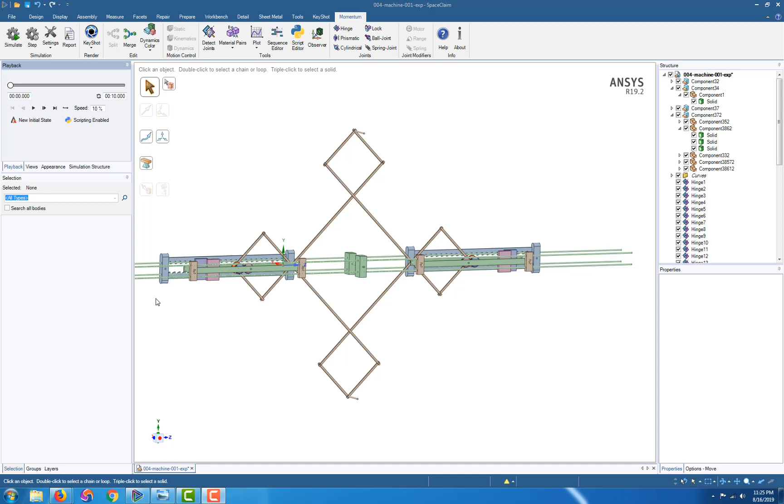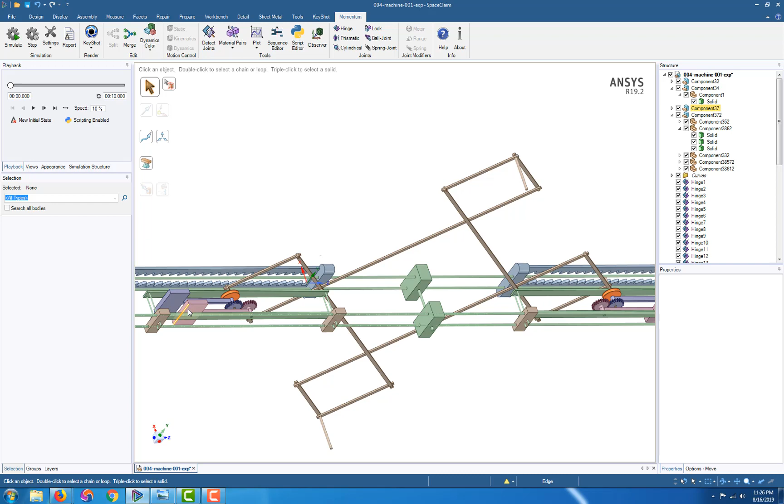Hello, I'm developing a different design. It's kind of the same, but I'm trying to fix some of the issues I had in the previous design, which is basically the synchronization of these hammers - that's the most important thing in this device. So there's a bit more pieces.

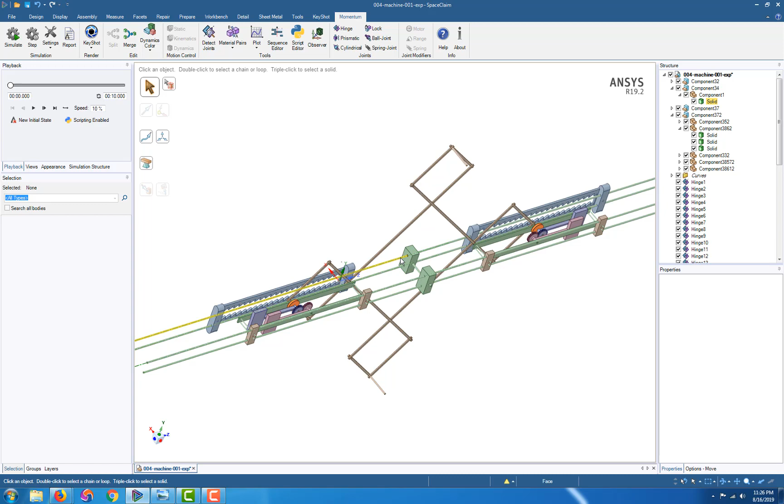There's like these bars doubled, but keep in mind this is a CAD design, and if you're actually building it you need to take into consideration the materials you're using, because there are some high stresses involved and they might bend or break, so you can't use just anything - it depends on how powerful you want to make it.

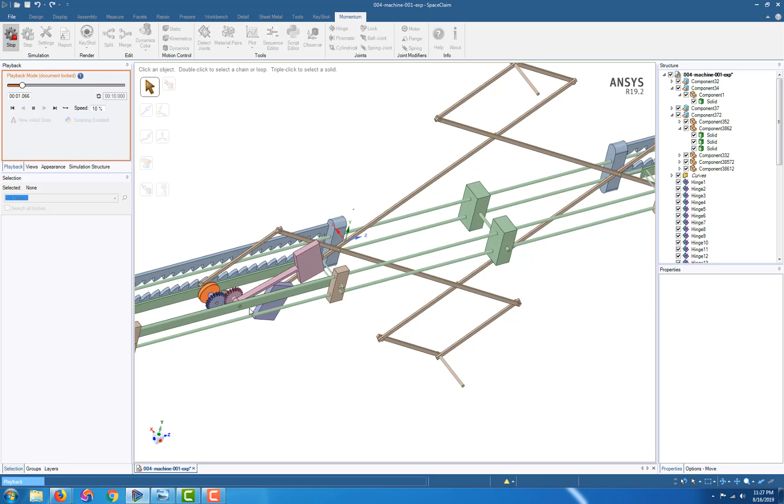Anyway, I've used motors on the blue hammers, and the pink ones are actually driven by the contact. I wanted to see how they're doing in this static situation, because I had all kinds of issues when I was trying to spin everything.

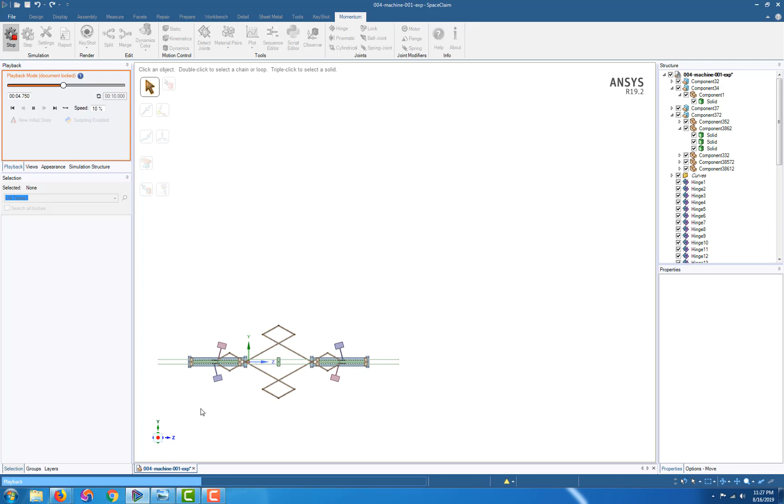It looks good, it moves good. Since I've tried to make sure that everything is balanced, as you can see, it stays pretty much on the center. There are no triggers in this device, not yet.

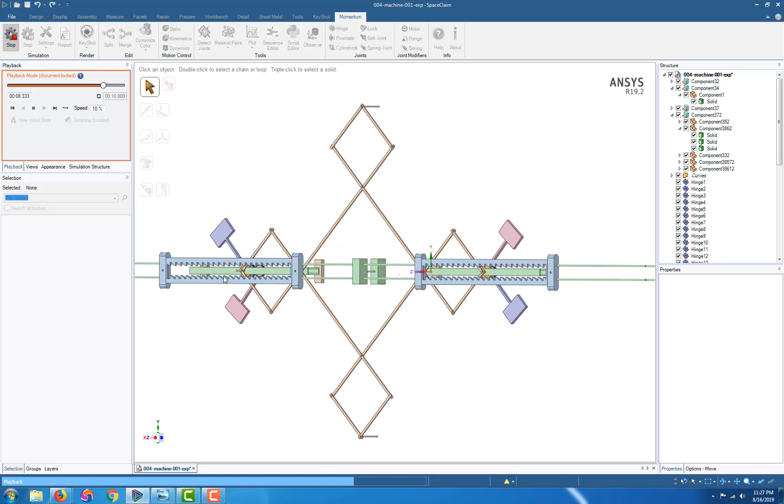It does need a ratchet system or something like that - pinion and stroke, I'm not sure how these things are called in English. Anyway, the idea is the same: one part gets blocked, and then the...

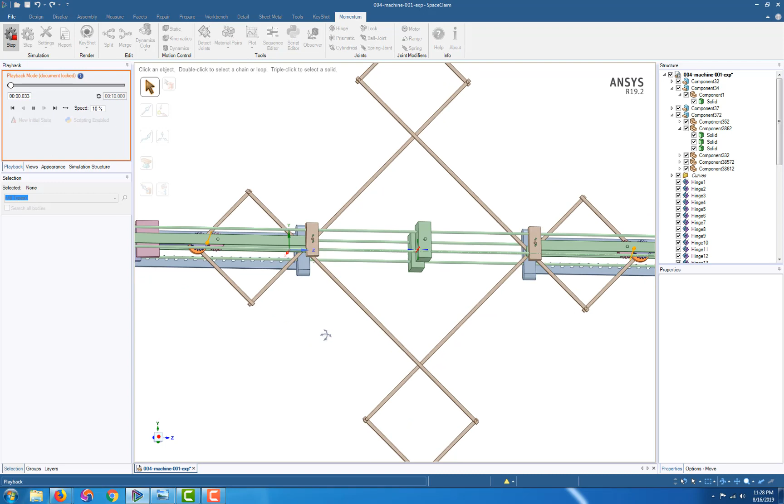The energy, the inertia, is pushing only one side.

As you can see, there are two contact points for the linkages. One is here and one is here on this side, and the reason for that is because when one blue big weight is getting stuck...

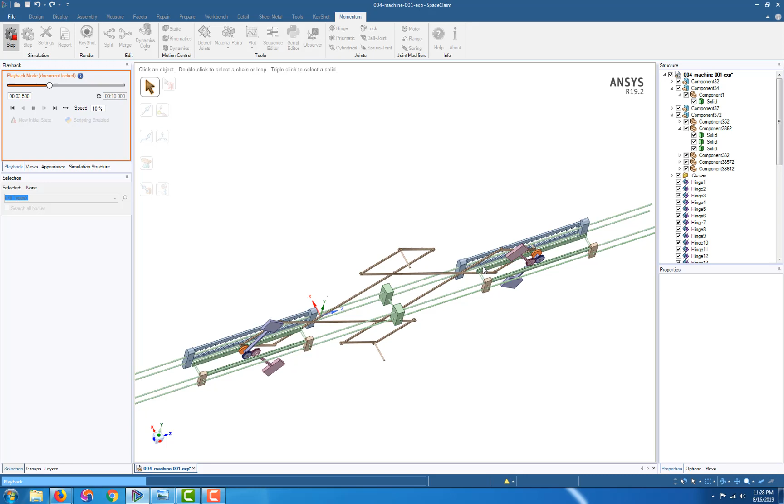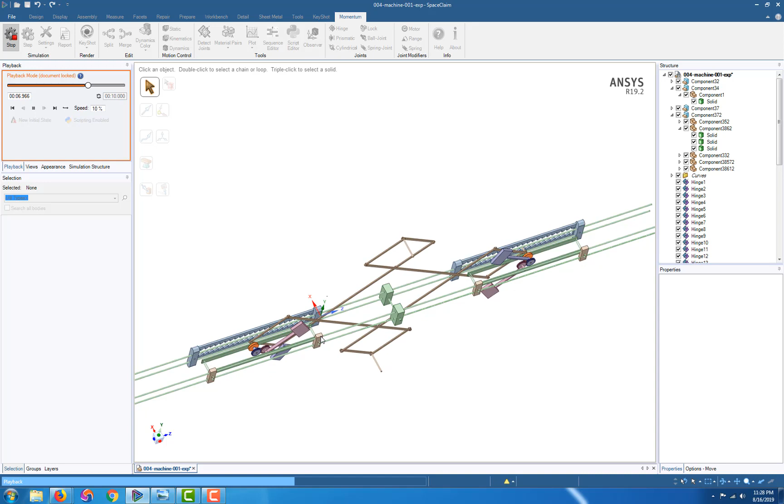Let's say this one on the right side - even though this would be stuck, the energy released through inertia from this hammer would still have an impact on this side, right? It's still being able to do some useful work, so that would be very helpful.

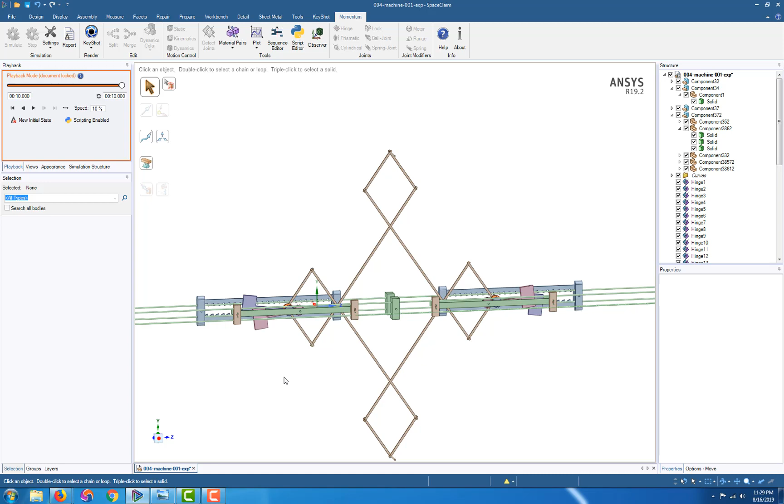Okay, so I want to tell you something else now. I don't know who will watch these videos, but you can achieve this with much simpler means. Basically, you need a motor, a generator, and one of these hammers, just one piece. You don't need both, but you need to put them...

...parallel to the earth and not perpendicular. And you need to use these bars, and this hammer must be linked to this piece. So let's say this is the axis of the hammer. Now the motor works here, not anywhere else, and this piece will start to slide back and forth due to the inertia.

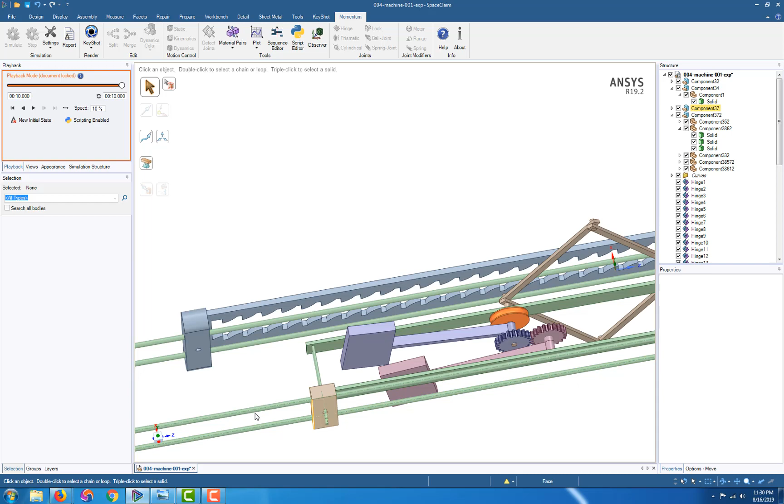Now if you convert this movement back into some rotary movement, and you couple it to a generator, you get your free energy. It's a lot simpler in a way to make it with a motor and a generator than all of this.

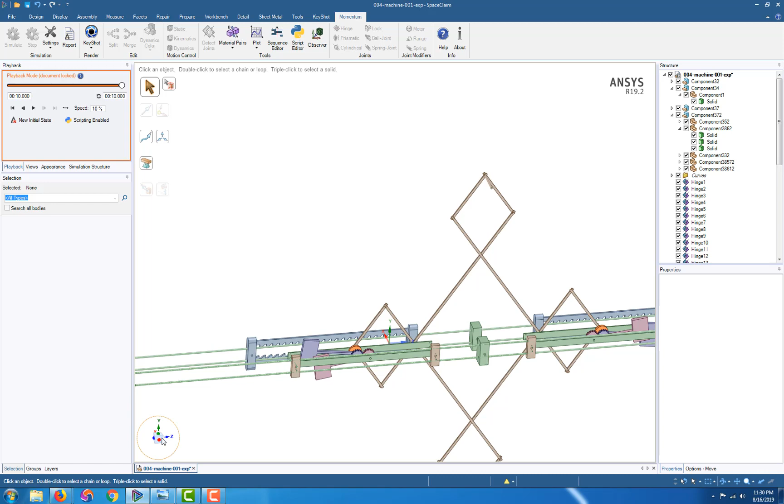Now that I'm understanding a lot better what Bessler was doing - he was using gravity only as a potential for the system. The idea was to make these hammers spin, and he was harvesting the mass inertia generated by the spinning hammers. These spinning hammers were actually the true source of power in his device, not the gravity.

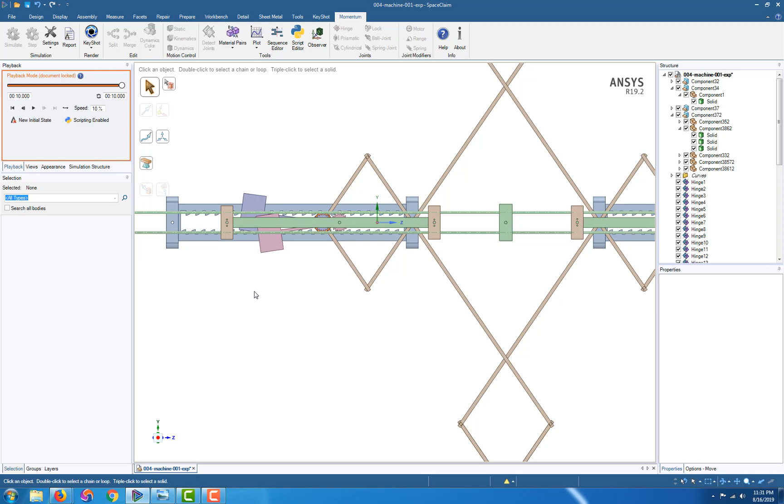But since there were no electric means back then, he had to come up with something. So he used gravity as a potential, and in a way the source of the machine, but it's not quite precise to say gravity is the cause that makes this machine work. It's a lot more subtle than that.